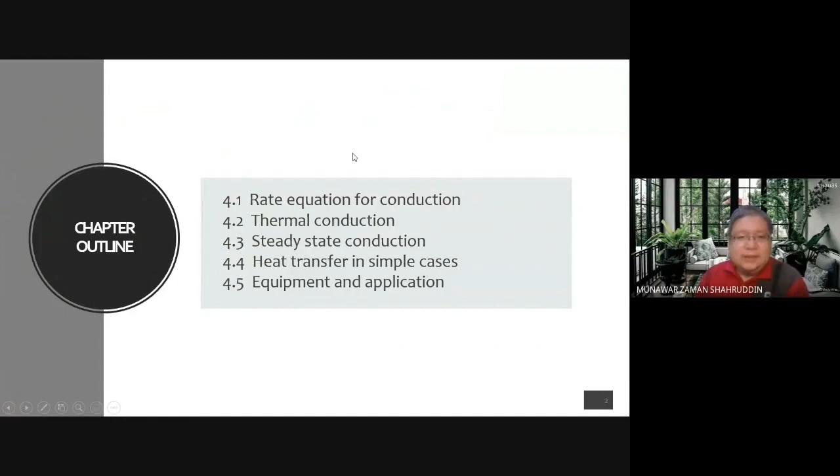Okay, this will be the title. Okay, so what are the words for heat conduction? Okay, it can be conduction, thermal conductivity, thermal conduction, heat conductivity, and so on and so forth.

Okay, this is the communication in between the students and the professor lah, tapi dalam bentuk burung, apa kartun lah. Okay, tak ada apa pun.

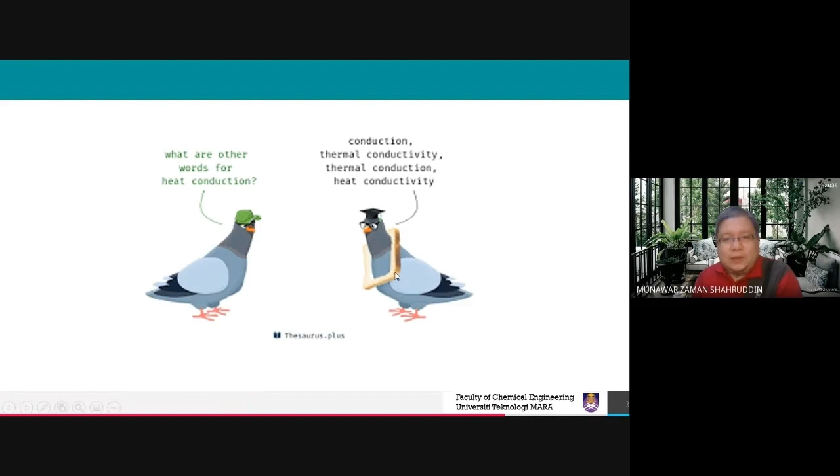Right, okay, this is basically being defined on the previous slide.

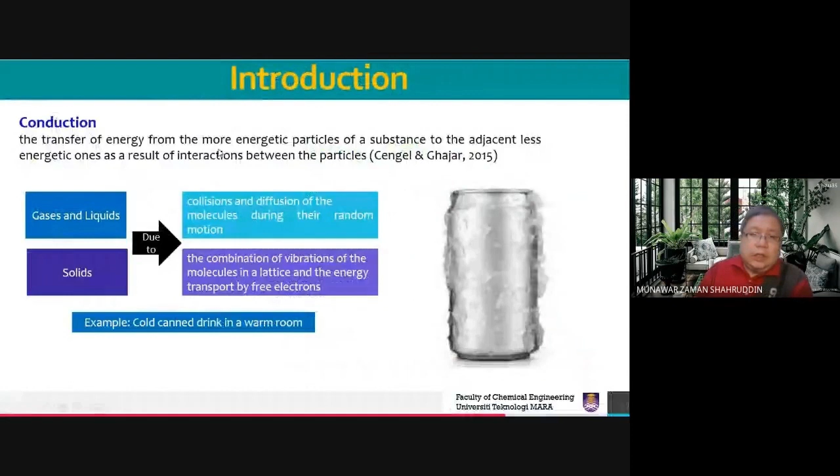Okay. In gases and liquids, it's due to the collision and diffusion of the molecules during their random motion, because in gas and liquid, the molecules and also the atoms are quite far from each other. Okay, not as tight as solids. Okay, so when we have solids, it's the combination of vibration of the molecules in the lattice and the energy transport by free electrons. It's either by the vibration or the free electron movement.

Okay, so for example, a cold canned drink in a warm room. Okay? So ada berpeluh dan sebagainya is basically the effect of the heat transfer activity.

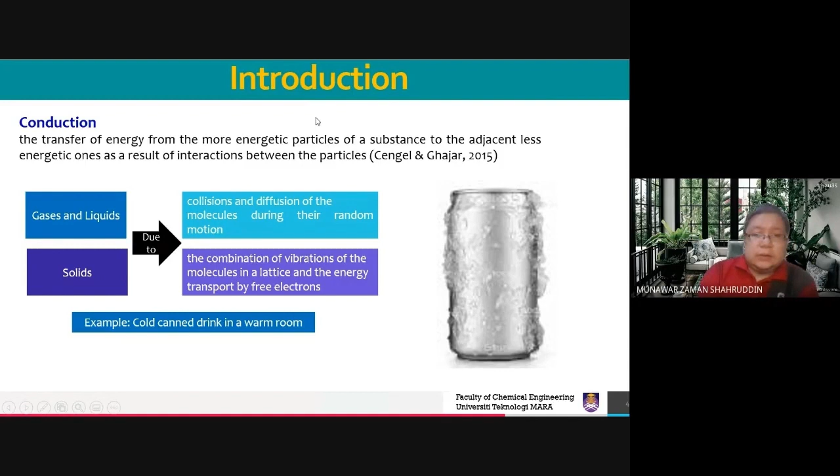Okay, we go straight to the rate equation for conduction. So the rate of heat conduction will depend on several factors. Okay, it includes thickness, which is delta x.

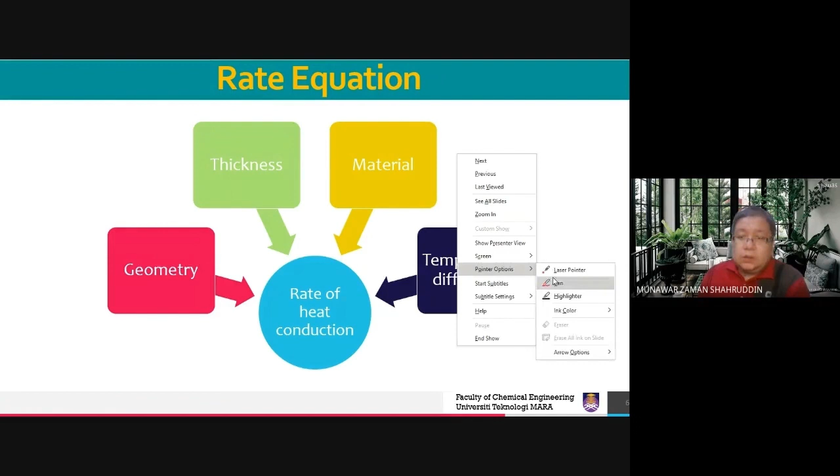Sometimes you call it delta x. Sometimes you call it L. So delta x and L. Okay. And then you also have material. Okay. So this one is related to k.

Okay. Normally we will only consider k because for conduction there will be no motion. Basically, it's the bulk condition of a material, or the stationary condition. Okay. And of course, the major one, which is delta T. Okay, and this one will depend on the geometry. It will reflect to A.

Okay. So for geometry we only have the conventional geometry. Kita tak ada yang pelik-pelik macam fin ke apa ke. Okay, we have plane wall, we have cylindrical wall, hollow cylinder, and we also have sphere. Okay, tiga tu je lah.

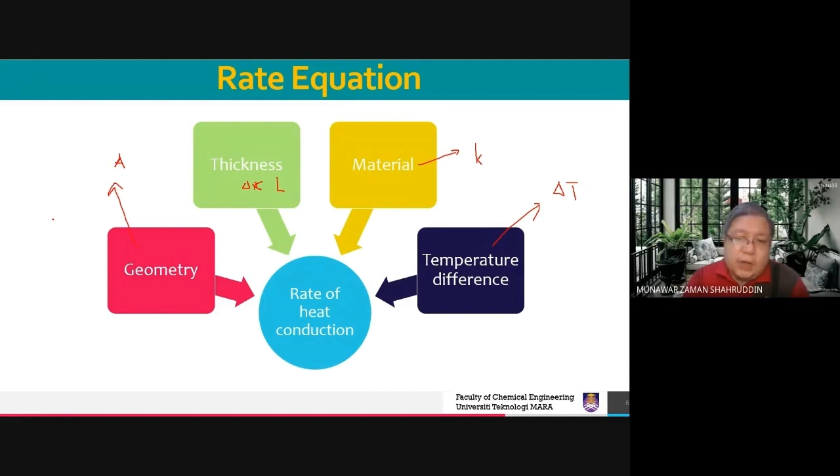Another one, that one is in convection. Kita panggil annulus. Okay, annulus ni is basically macam dalam drilling you tu lah. So basically dia adalah cylinder, tetapi dekat tengah-tengah dia ada lubang, in between internal diameter dengan external diameter. Okay, that is what you call annulus.

Okay, so in conduction we don't have that. We only have that in convection. So this would be the four factors which influence the rate of heat conduction. Okay, right?

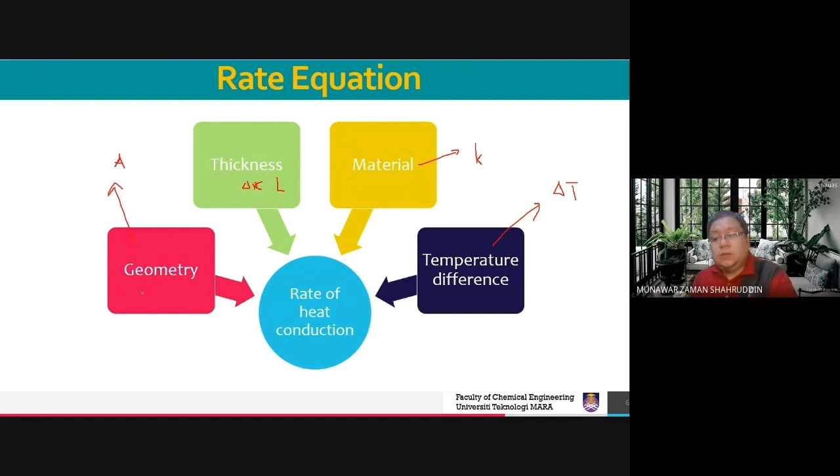So you can formulate another formula rather than this one, only to relate those two variables. And you also have A, for area. A is normally not visible when drawn like this, because it is the surface. On the side, this is its height, and this is its width. So normally height times width is A. So for a plane like this we don't see it.

And you have Q as the rate of heat transfer; the dot means rate, meaning per unit time. So basically this would be the experiment that's being performed. Based on that experiment, when delta T, T1 minus T2, and A are doubled, Q will also increase proportionally to delta T and A. And once you double the value of delta X, you will find that Q is halved.

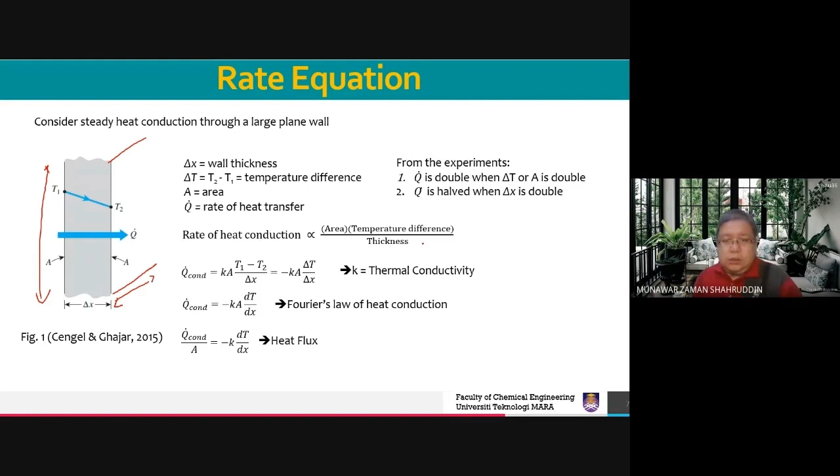And if we move A to the other side, we will have Q conduction over A, called heat flux. The only difference is that heat flux is per unit meter square. So that would be the fundamental of heat conduction. Okay, this one is the example based on this equation.

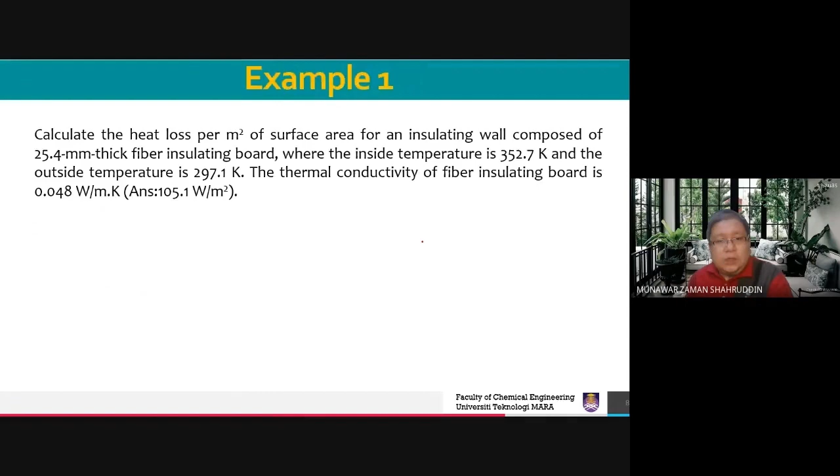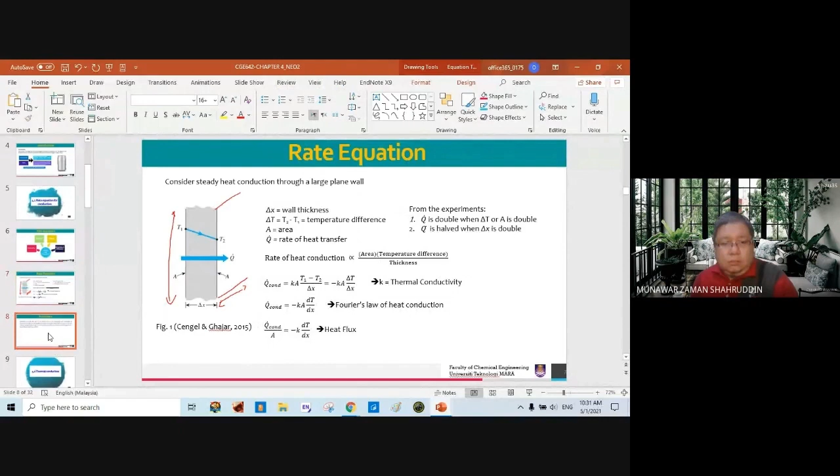So you have this system, the thickness of the wall is 25.4 millimeter, so you have to convert it to meter, 0.025. Fiber insulating, and the temperature inside and outside is 352.7 Kelvin and 297.1 Kelvin on the outside. So find the difference to get delta T, T1 minus T2: 352.7 minus 297.1. And you have the conductivity value of 0.048.

And they only want you to determine heat loss per meter square. So you are actually looking at the heat flux. It's not Q conduction, it's Q conduction over A, or you can always assume A as 1 meter square. So you will get the answer of 105.1 watt per meter square. This is a very easy calculation. You should be able to get it, very straightforward.